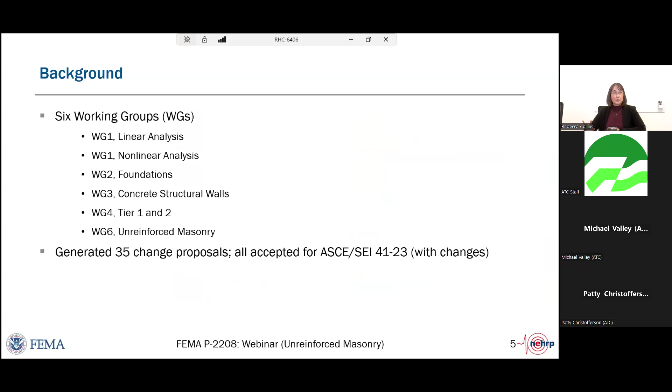There were 6 working groups that generated 35 change proposals for ASCE 41, including the technical background for those changes. All of these changes were accepted by ASCE 41-23, and now FEMA is funding presentations on the technical background for 3 of these sections. The nonlinear analysis one has already taken place, and the recording is available from ATC.

Concrete structural walls is coming up in a couple weeks, and today we're doing unreinforced masonry.

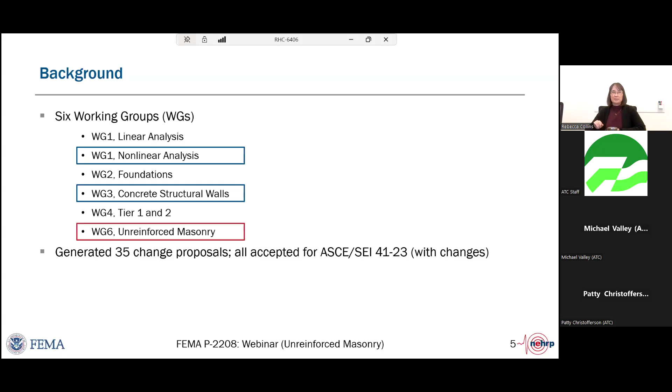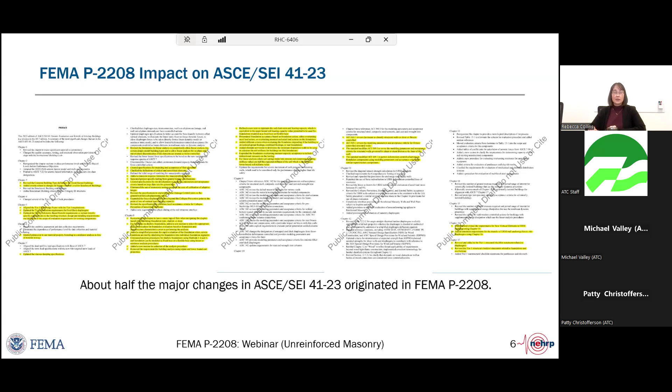This slide shows the first 5 pages of ASCE 41-23, which is a summary of all the changes made in the document. About half of the major changes in ASCE 41 began with material provided by this ATC 140 project. So this FEMA funding has made a huge difference in getting the standard updated.

The recommendations of FEMA P-2208 were modified by ASCE 41 committees, so the document contains the technical background, but not the final standard language. That's something to be aware of—you can't just take the FEMA P-2208 language verbatim, because it might have been changed a bit.

It's intended to be used in conjunction with ASCE 41. We're presenting the recommended revisions that came out of this particular project, but it's just the technical background, not how to use the document.

For the final changes, ASCE intends to present webinars on the various topics, and these webinars can be purchased and viewed on their continuing education page. That's where you would go for exactly how to implement ASCE 41.

FEMA is also going to update P-2006. This was the design examples for ASCE 41-13, and now it will be updated to cover ASCE 41-23. That document is expected to be released in late 2025. Work's already underway on it.

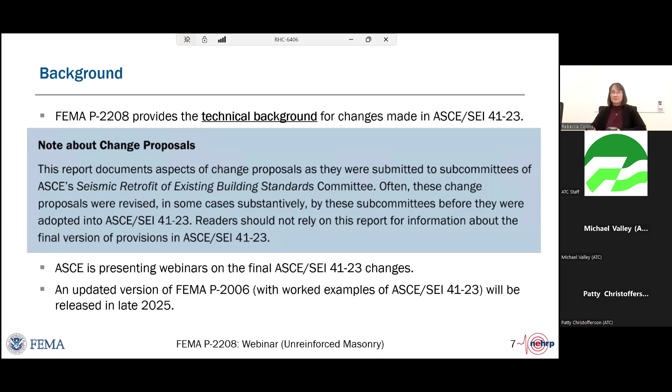The motivation for updating this standard is the seismic risk from existing buildings is very high, especially those that were constructed prior to the development and adoption of modern building codes. For masonry in particular, the majority of ASCE 41-17 goes back to FEMA 273, which was published in 1997, and that goes back even further to the ABK method developed in the 1980s. So a lot of this hasn't been updated in a while.

Chapter 11 has had some sections updated more recently, mainly spandrels and the wall failure modes. But the further research that has been done since that time, and use of the updated provisions, has led to a desire for more changes.

Just so everybody's aware, unreinforced masonry occurs in two places in ASCE 41. There's Chapter 11, which may be used for any performance objective and works with the main body of the document. Chapter 11 just covers masonry, and for your demands you'd go to the analysis, Chapter 7, working it in conjunction with all the other sections.

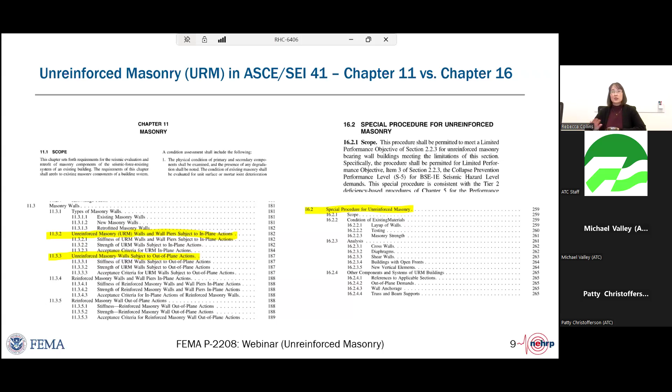Whereas the Chapter 16 part of unreinforced masonry is just the special procedure. It's a limited performance objective, meant to be more standalone. Chapter 16 evaluations identify the major flaws in URM buildings, but typically at a lower seismic hazard level. Chapter 16 is also limited to certain building types - for example, they have to have flexible diaphragms, be 6 stories or less, and there are other requirements. So the items discussed today, we'll try to clarify which chapter they're applicable to, because they're not just mix and match.

Starting off with new vertical elements in Chapter 16: the URM special procedure has always done the evaluation of URM buildings, but it didn't have clear provisions for retrofit of those. ASCE 41-17 added some retrofit provisions, but they actually stepped outside the special procedure, mixing and matching between the main body - go get your demands from Chapter 7 - and then trying to come back to the special procedure. This was a bit confusing, and it also made retrofits more conservative than the rest of Chapter 16 evaluations.

Another issue is deformation compatibility. New elements are often not stiff enough to attract loads away from the URM before it fails, so we wanted to address that. There was also no clear path for distributing shear between new and existing elements, and detailing requirements for new elements were never mentioned in the special procedure.

So the goal of our working group was to create an integrated set of provisions for new vertical elements going into a URM building that deals with demands, drifts, and detailing.

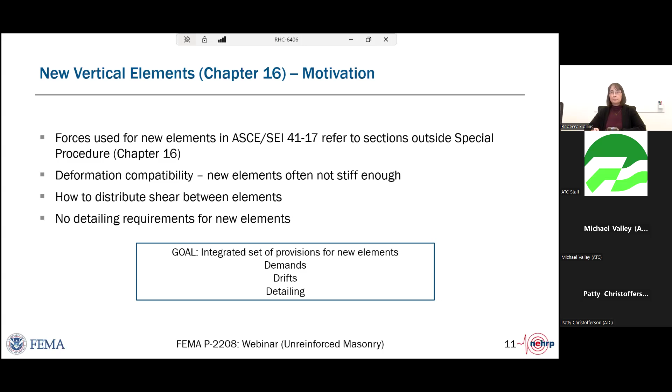Three different case study models were developed. We started with this 2-story model with lots of openings, then stretched it up to 6 stories or collapsed it down to 1 story, keeping the same footprint and opening distribution, just to see what would happen with different variables.

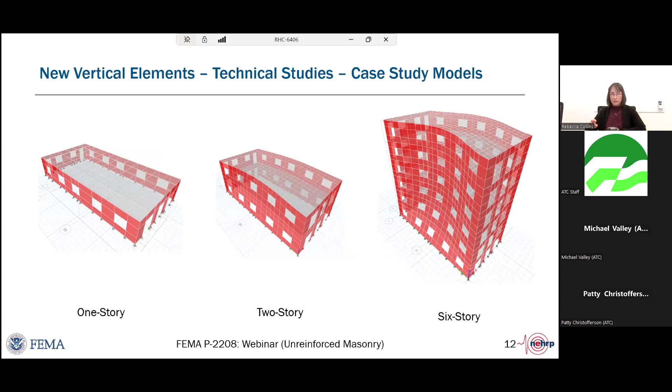We also looked at 3 different retrofit scenarios. We studied the transverse direction, as that was the direction the building had the most issues. In situation 1, we added shotcrete on both ends at the front and rear elevations. Another retrofit option was putting an element in the middle of the building, either a reinforced concrete shear wall or a steel moment frame, which would take some of the seismic load and reduce the burden on the 2 end walls.

Situation 3 was where we studied an open front building. These are very common, especially along main streets where you'll have retail at the first floor. Here in Seattle, we often find it's just cast iron columns - no masonry, no moment frame - and something needs to be done to strengthen the building there. We studied both steel chevron brace frames and steel moment frames. Not all these retrofits were applied to all the different combinations, but we did study quite a few.

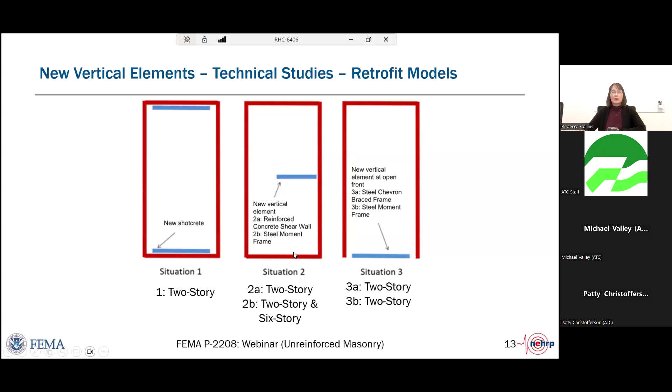In this particular case, we had a new concrete shear wall added along one elevation. It was only done at the first floor because the upper floor demands were okay. We compared it to the unretrofitted condition using demands based on the special procedure, Chapter 16. We also looked at it with demands based on Chapter 11 with and without M factors. Basically we tried all the different possible methods we could think of for designing this new element and see what the results were.

What we found was using Chapter 11 was really difficult, as determining an M factor wasn't simple. The concrete and the masonry are now attached, so it's not obvious how they would interact - do you use an M factor for concrete, for masonry, or is it somewhere in between? Based on past studies with FEMA 547 and FEMA P-2208, and this current study, we decided to recommend making it clear that new elements may use demands based on the special procedure, so essentially we're getting a retrofit behavior that's consistent with the special procedure goals.

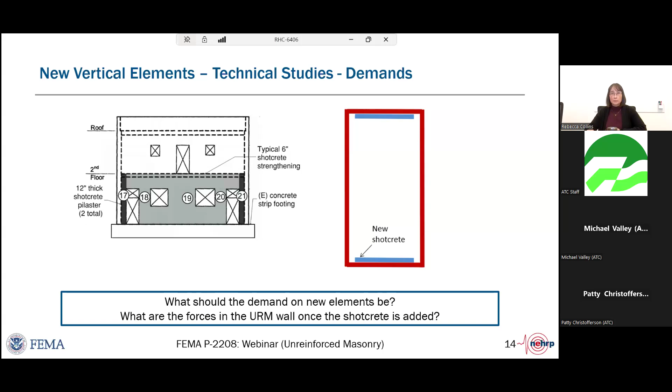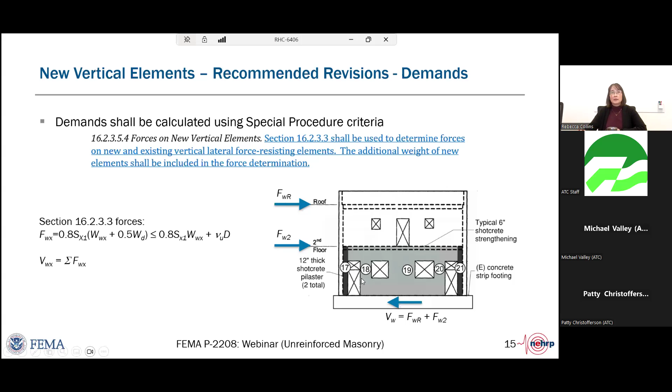Using that special procedure, you would use the same equation you were already using to calculate your loads on your URM walls. In this example, your roof load wouldn't change because you haven't changed your weights or your diaphragm weight or capacity. Then at the second floor, you'd have an increase in load because you'd include that wall weight. Summing up the roof and second floor would give you the demand on the combined wall - concrete wall plus URM - and that would give you your demand.

And then once the wall force is calculated, the recommended revision clarifies that the shear distribution should be based on relative rigidities. So your URM wall stiffness and concrete wall stiffness would be calculated, and then you proportion your demand based on those stiffnesses. Each wall only needs to be checked for that portion.

Also, you do need to check the URM, even if you decide to say, well, I'll just design my concrete wall for 100% of the forces. It's still a requirement to check the URM wall and make sure that it is not going to fall apart.

So the impact of this change is you're going to have reduced demands compared to what we had in 4117, because you're not stepping outside the special procedure and using the Chapter 7 analysis, because the special procedure forces are lower. An engineer may still conservatively design the new concrete wall for 100% of the forces, but you are going to have to check the URM on it.

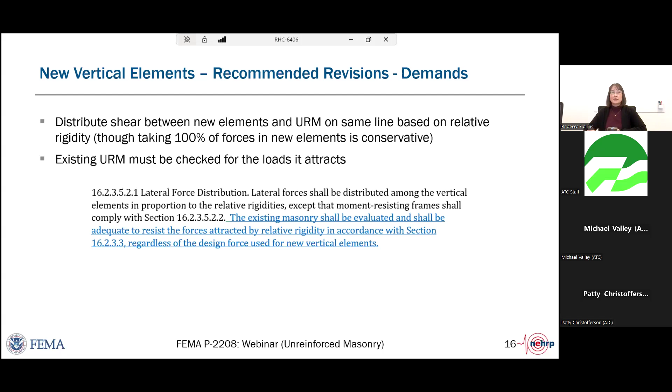Now, sometimes you try to design your concrete wall, or maybe it's a steel moment frame or brace frame, and you find that you get ridiculously large sizes in order to protect your URM wall.

So we did add commentary to help address that, saying that if you want to design your new elements for 100% of the load and not check the URM walls, you can, but then you have to provide complete gravity support for your floor and roof framing. And you have to have vertical bracing of the URM walls to prevent them from becoming falling hazards, so they'd have to be tied back into whatever you're doing. So essentially your URM wall just became very thick cladding. That is still allowed if you start to get ridiculously large sizes for your new elements.

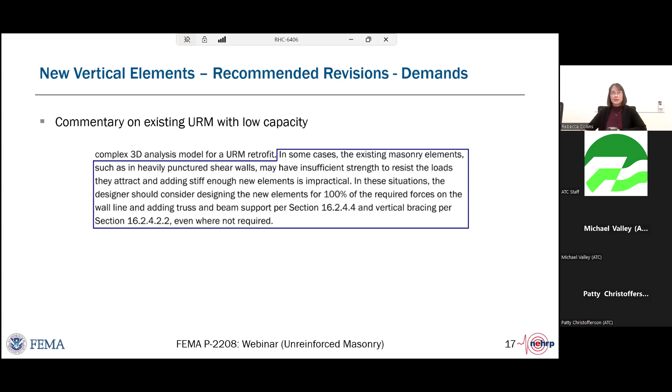So for drifts, we studied reinforced concrete shear walls and moment frames placed at midspan of the diaphragm to see what this was doing to our diaphragm and to the two end walls.

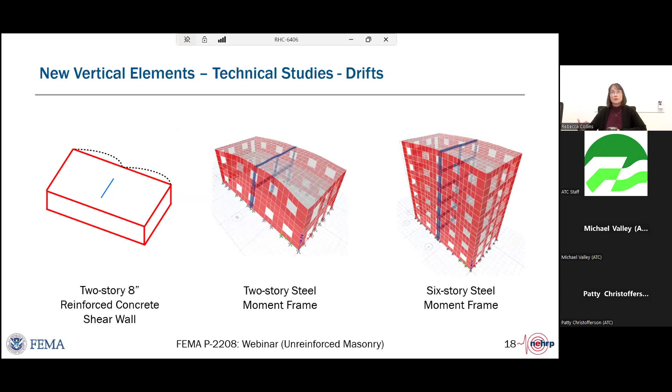So currently ASCE 4117 has a 0.75 drift limit, but only for moment frames, and it's actually at a different force level because it was stepping outside the special procedure. So we took a look at, well, what if we have all these different drift limits from none on down to 0.75% were studied.

And what we found is that at the very high limit, or no drift limit, the steel moment frames tended to produce about the same midspan diaphragm drift as an unretrofitted building. In other words, the steel moment frame isn't actually pulling load away from the two end walls effectively. It really took until you got down to the 0.75 drift limit to cut the mid-span diaphragm drifts in half.

So that was going to be where the recommendation was leading. We did design these frames with a 2D program because we want to try and make sure this is easy for engineers. If you want to go in and design a new element, it's flexible diaphragms, URM building, you could use a 2D program. So we did that initially, and then we checked it with the 3D program and found that the answers were acceptable.

Another thing that we found as we were looking at diaphragm drifts was what your diaphragm span was. Currently the diaphragm span, the way it's defined, is between URM walls. And we realized that that shouldn't actually be correct. We really should revise the language to say that the diaphragm span should be between vertical elements.

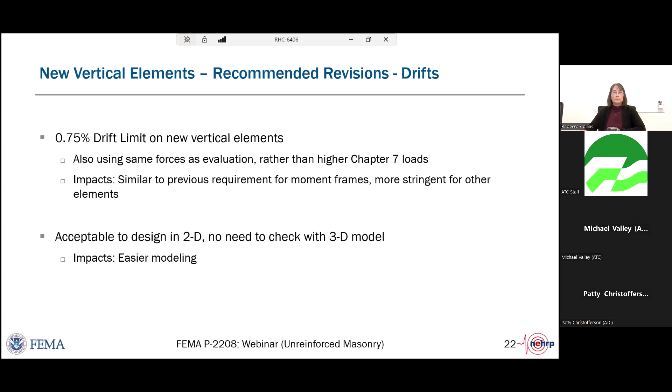We also looked at detailing for new elements. Once you start using that 0.75 drift limit, this really leads to members that are much larger than needed for just the force demands. So the highest demand to capacity ratio we had was around 0.5. So there's a good amount of overstrength in this system now, and you only need limited ductility from your new elements.

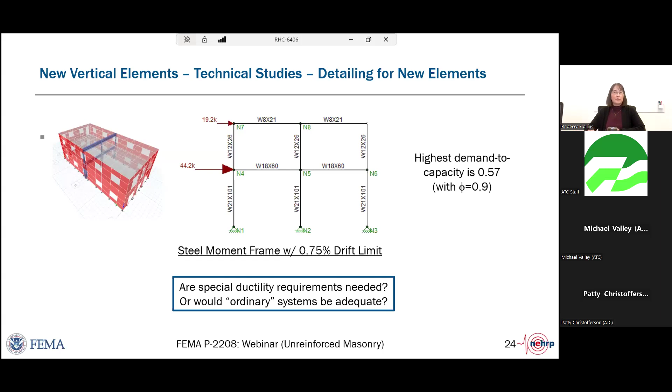So this led to the question of, do we really need to say we have to have special systems? Do we need a special moment frame, or would an ordinary moment frame or ordinary concrete shear wall be acceptable?

So we did go through and do a review of what the ordinary requirements are. For a steel ordinary concentrically braced frame, the braces, you can actually allow tension-only members. They only need to be moderately ductile. And then for your brace connections, you design them for basically the member strength and with some overstrength factor when you're looking at new design. So this is all the requirements there are.

Whereas if you look at a special system, you've got a much longer list that needs to be met. Similar for ordinary moment frames, you don't need special B over T ratios, no protected zones, just the higher design on connections to make sure they're stronger than the members.

And for ordinary concrete shear walls, Chapter 18 doesn't even have any detailing requirements for them. You would just default to Chapter 11 in ACI 318 that has some minimum reinforcement ratios, minimum bar spacing. As a matter of fact, we were a little surprised to see that it didn't even require you had hooks on your horizontal bars at wall ends.

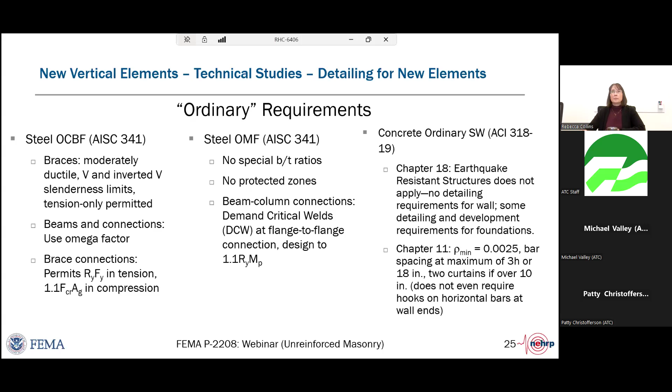So the recommendations we made were that an ordinary system is acceptable since we only need limited ductility. One exception was we did decide to say that reinforced concrete shear walls, you do need a 90-degree hook on the ends. It's a limited addition, not a lot of expense, and it'll still give you better behavior.

The other thing we looked at was to make sure that certain systems that are not permitted in seismic design category C in ASCE 7 are also not allowed for vertical elements in regions of high seismicity in 41.7 and 41.23. Basically, the systems this eliminates are your unreinforced concrete shear walls, unreinforced masonry shear walls—you can't add new ones—or reinforced concrete moment frames, the ordinary ones.

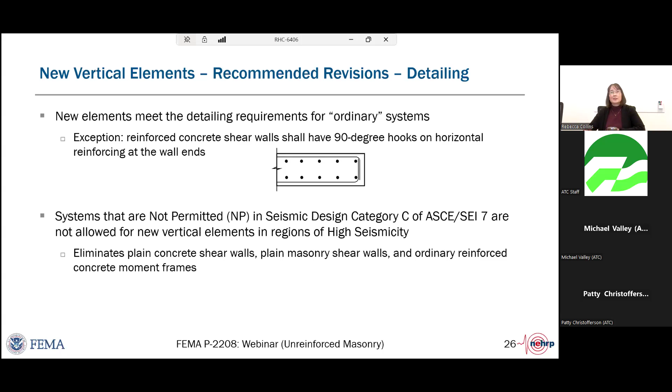So these are systems that aren't usually used anyway in areas of high seismicity, so we're not really changing what engineers are doing most likely in their designs. So that was the vertical elements. Now looking at subdiaphragms in Chapter 16.

The special procedure in 41.17 requires that you anchor the walls, the URM wall, to the diaphragm. This, as everybody who's looked at URM knows, is one of the biggest things we can do to help prevent failures on these buildings. However, it doesn't explicitly require developing that load into the diaphragm. You can just provide an anchor from the wall and connect it to the first joist bay, and that would meet the provisions in 41.17, Chapter 16.

Without this additional strapping and blocking, though, you could actually end up with the floor fracturing at this first joist bay, and we don't want that behavior. So this is different from the main procedure in 41.17, which does require that the wall anchorage be developed back into the diaphragm. But since the special procedure is standalone, it doesn't reference back to that piece.

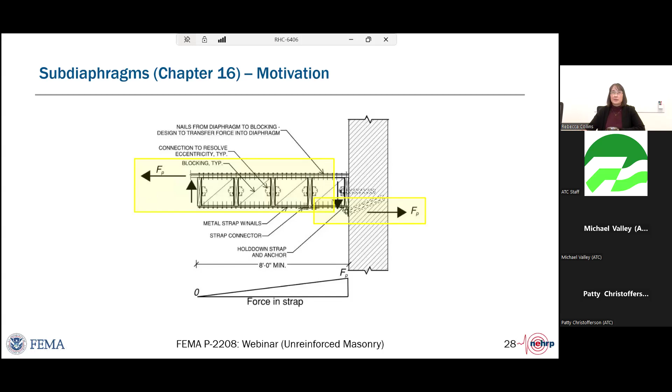So our proposal was to develop the anchorage. Basically, we mirrored the requirements back in the main procedure of 41.17 using subdiaphragms. So this does require that you'd have to calculate subdiaphragms, cross ties, and chords.

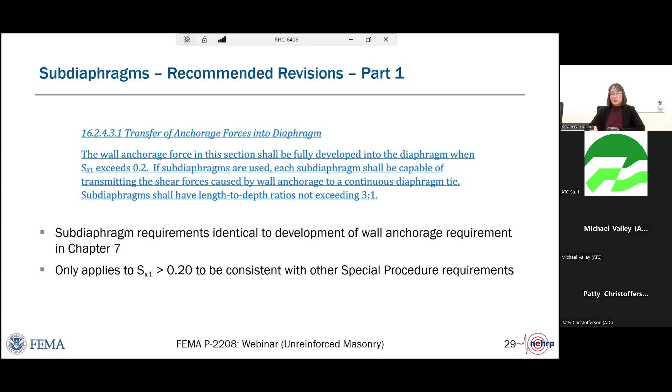So that's one path, but we also wanted to consider a simpler path since this is the special procedure. It's a limited performance objective. The intent is to encourage and not discourage an owner to undertake these retrofits. So in addition, wood diaphragms also behave in a ductile manner, and they potentially have greater capacities than the prescriptive calculations. So as an alternate, simpler method that we studied, we started with an example building and we looked at full code.

Over here on the left, this is what you'd have to do: calculate your subdiaphragms, your cross ties, all the way across the building. We also looked at a partial code method. What if you just develop your anchor 10 feet or maybe 8 feet back into the diaphragm, and you don't do the cross ties and you don't do the subdiaphragm calculations? We studied this for both transverse and longitudinal directions. I'm just showing the picture for transverse here.

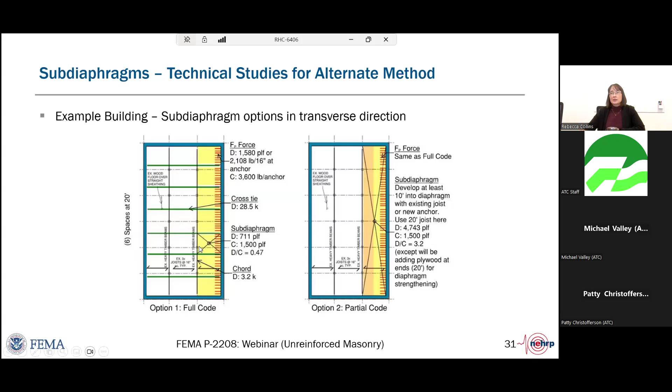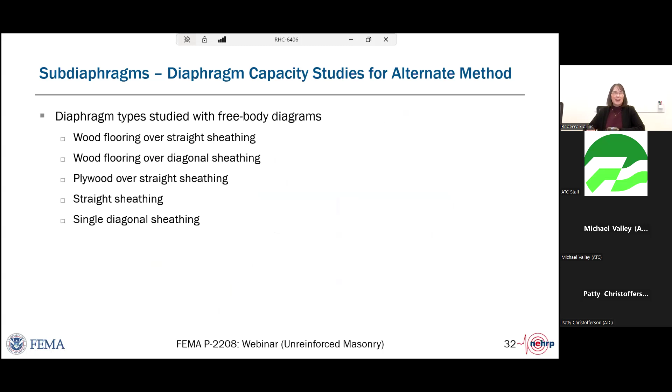And when we looked at the subdiaphragm forces, if no cross ties were added, we did the calculations and compared them. We also looked at what would happen with the different diaphragm types. So if you don't have subdiaphragm chords or cross ties, you still have a diaphragm that continues across those boundaries and could potentially develop forces.

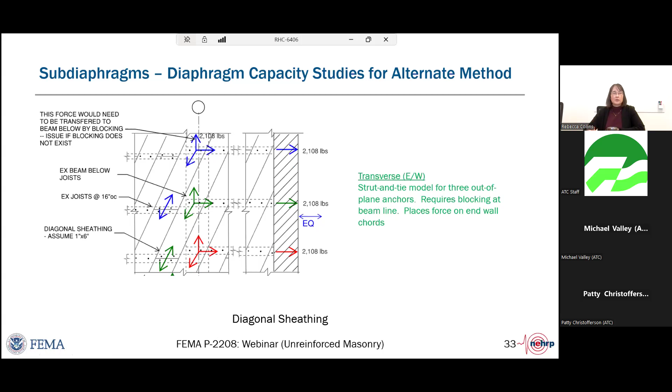So then we combined our building case studies and our diaphragm studies into a giant parametric study where we changed building size, diaphragm aspect ratios, looked at solid walls with openings, different diaphragm capacities, and different development lengths.

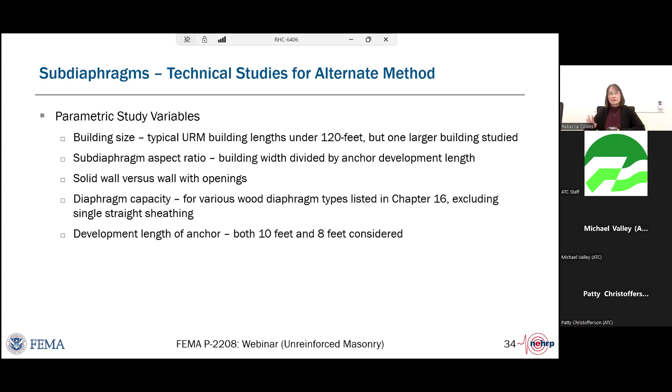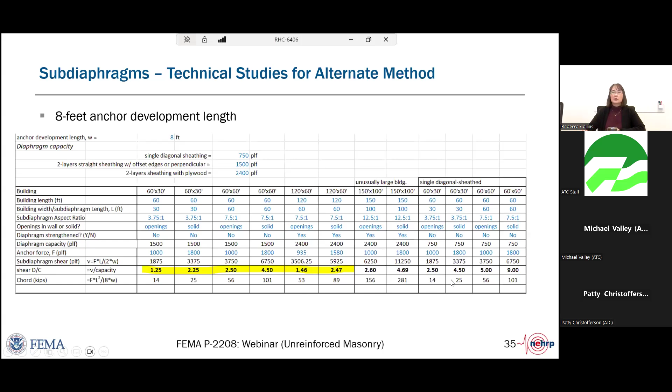And for typical building sizes, using Chapter 16 diaphragm capacities, not our larger ones from those studies, we were getting DCRs under 2.5. We did end up having to exclude single diagonal sheathing. The DCRs jumped up way too high on that one, so we ended up saying we're going to need to exclude that because the DCRs were too high.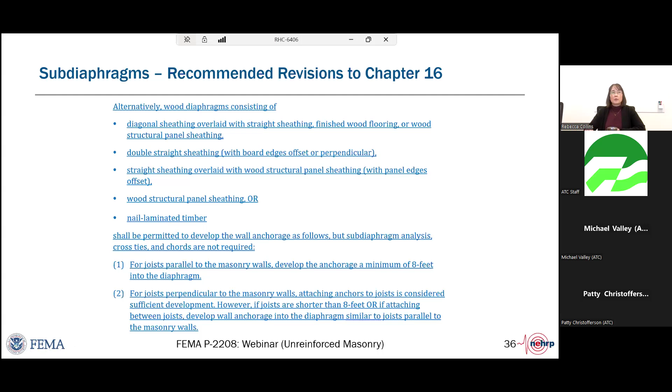So based on all those studies, there's also a simplified path compared to a full subdiaphragm analysis that takes advantage of these more ductile wood diaphragms. So you only need to develop your anchorage a minimum of 8 feet into the diaphragm.

So going back to our wall anchorage figure, if no subdiaphragm analysis was performed, you could come in and say we're going to develop it back 8 feet. This is showing joist parallel. You could also, if the joists are perpendicular, attach your anchor to the joist. And if your joist is longer than 8 feet, then you would be done. You wouldn't have to remove finishes and come back going further into the building.

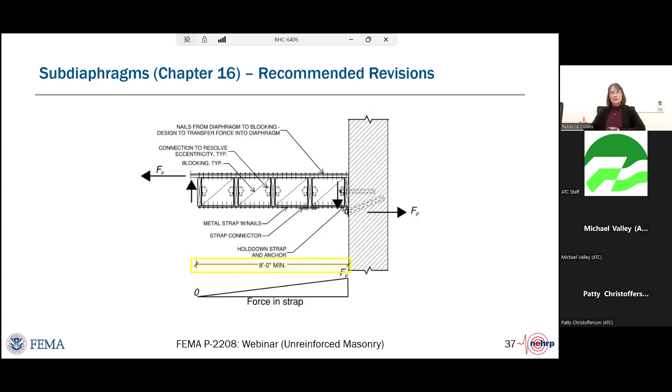So the impacts of this revision are we can get better URM performance because our anchors are now developed. We're requiring that, but we're allowing multiple methods to meet the requirements. You can do a full analysis, or you can come in and do something quicker and just say 8 feet. We'll make sure and meet that.

For wall out of plane behavior, we looked at this for both chapters 11 and 16. In chapter 11, we're still using this table for collapse prevention for H/T ratios on the URM walls, and it's based on older research, and that research at the time stopped at about 0.4 G. But we now have many areas in the country with much higher spectral acceleration values.

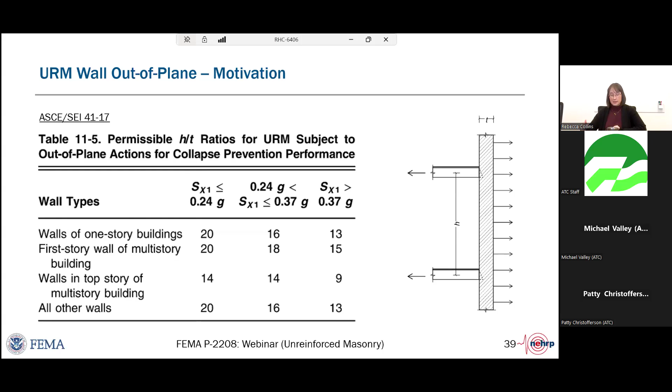Chapter 11 did include an updated H/T ratio out of plane check for life safety that was based on the Penner and Elwood method. And we'd like to bring the different performance levels all into one standard system, not some equation, some table. We also want to address what to do for limited safety and damage control performance levels because they weren't addressed.

And this equation method that's in there, the Penner and Elwood method, has a bunch of different variables. It depends on diaphragm stiffness, axial load on the walls, wall thickness, and performance level. Penner and Elwood included these variables, but they do note that there are a lot more variables that would still need to be tested, and they recommended a bunch of future studies. So hopefully someday we'll get that, and maybe we can incorporate more items into this.

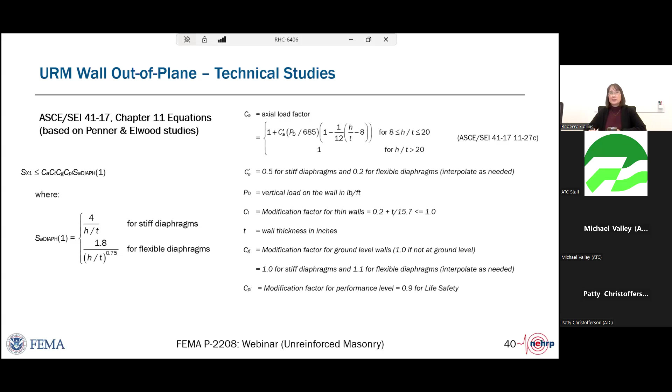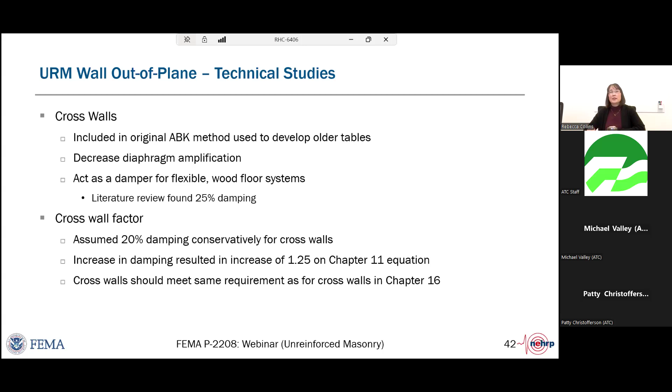Adding another factor into it would allow us to increase the damping. Well, the damping's already there from the cross walls, so it would allow us to increase our H/T ratios up to 25%.

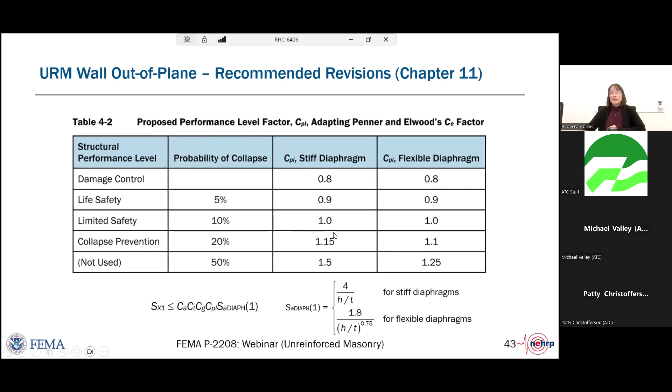So the result of this study is we ended up with new factors, not just for life safety, which was in there previously for the equation, but now we have factors for the other performance level methods. We get a little bit of a benefit from stiff diaphragms, so we're going to keep that in for collapse prevention.

We also added the new crosswall factor to the equation. The old collapse prevention table of H/T ratios will be deleted from the standard. So the impact of this is going to be at those higher seismicities, Seattle and San Francisco, but other areas also - your H/T ratios are going to be much lower. So more walls are going to require strongbacking in high seismicities.

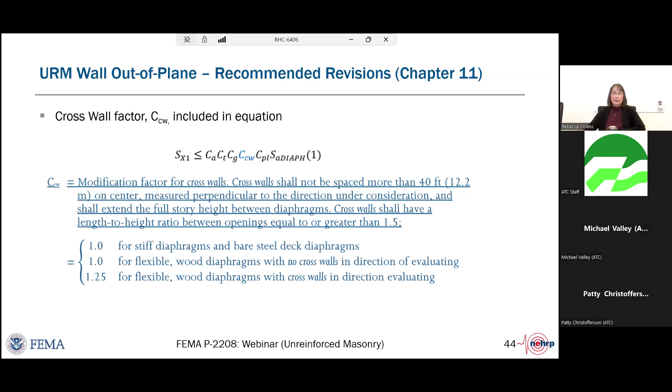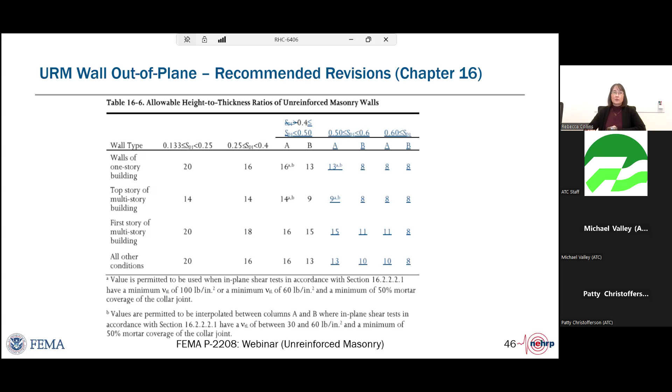So, wall force redistribution. A little background: there are 4 failure modes that are checked in Chapter 11 for wall piers. Two are deformation controlled modes, rocking and bed joint sliding, and two are force controlled modes, toe crushing and diagonal tension.

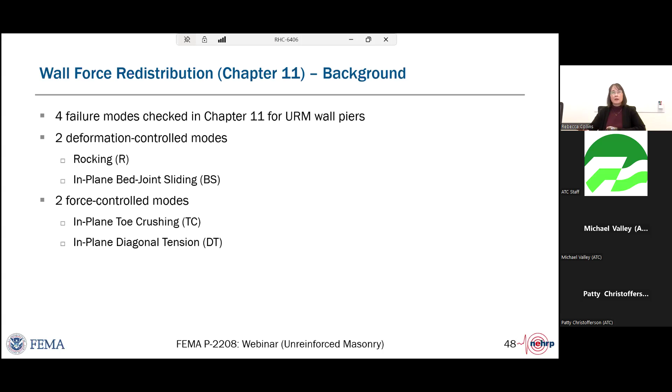So we have this kind of mix and match of some deformation controlled, some force controlled. That's not so bad when they are in separate lines, especially separated by flexible diaphragms. But the linear methods don't specify how to evaluate multiple modes in a line of resistance, so typically we look at each individual component when we're doing ASCE 41 and evaluate it separately. This is also true of concrete piers in ASCE 41.

So there's no provisions to allow moment redistribution between wall piers in the same line. However, Chapter 16, the special procedure, does classify the wall piers in the line based on their behavior in relation to each other. So for example, if you've got rocking controlled piers in a line with shear controlled, you actually ignore them and distribute the load to the shear controlled walls. There's a whole flow chart you can find for this special procedure on how to negotiate this when you end up with mixed modes in the line.

But what it does is allow the engineer to better utilize the total strength of a line of resistance. Just because you have one wall fail in that line doesn't mean that everything needs to get strengthened.

So we wanted to come up with some method that would allow for moment redistribution if possible, so we can better utilize that total line strength. Nonlinear studies have indicated that once you get yielding in one component line, it starts to redistribute.

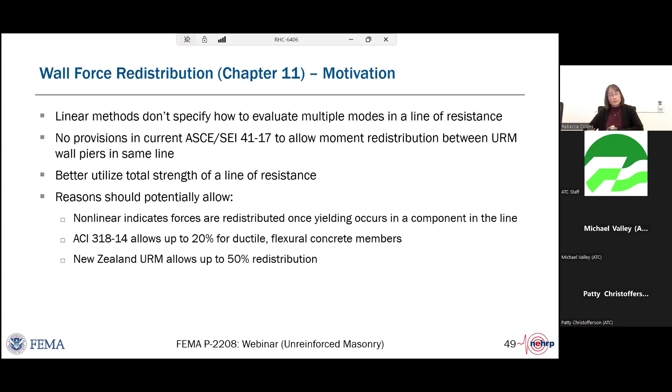Here's an example of where moment redistribution could potentially be possible if you've got mixed modes. This case just included deformation controlled modes. We started with that, and you can see here the two end piers are rocking controlled, that's our little R there, and the two interior ones were governed by bed joint sliding, that's the BS on those two interior ones.

All these walls have the same stiffness and the same demands, so they're all 12 kip demands. The capacities are slightly different because there's a little less gravity load on the two end piers, so that's why they ended up being rocking controlled instead of bed joint sliding. These two end piers with the rocking are just shy of the capacity to work, 11 kips versus 12, whereas the interior ones have extra capacity, 15 kips versus 12.

So it seems like we're really close to making this wall work, but technically the provisions would say it fails. The two rocking piers would need to be strengthened.

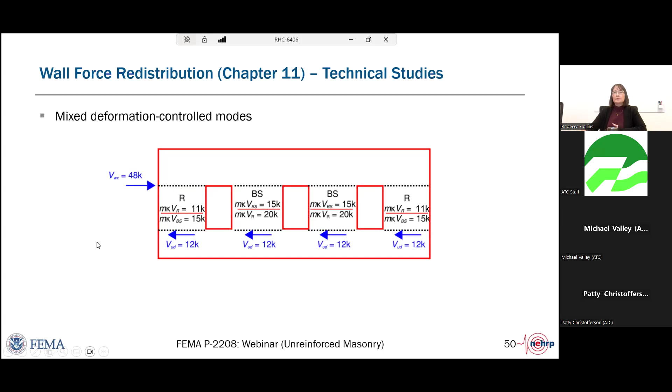We also looked at what happens if you mix deformation controlled and force controlled elements in the same line. So if you have rocking and sliding, but you also add in diagonal tension, which is force controlled, the catch is that these force controlled elements have much more brittle behavior. So it's not going to be the ductile modes we're hoping for. After looking at all of this, we determined it's not really acceptable to permit redistribution once you get force control mixed in.

This is consistent with the New Zealand code, which only allows it if all the wall piers are deformation controlled. In addition, 41-17 requires that rocking wall piers be neglected in lines of resistance that are not all deformation controlled. This bottom figure shows that with one force controlled pier, you then have to ignore these two rocking controlled piers. Their demands would go down to zero, and that demand would be redistributed to the two interior piers, at which point your interior piers are so much worse that redistribution wouldn't even be possible in that case.

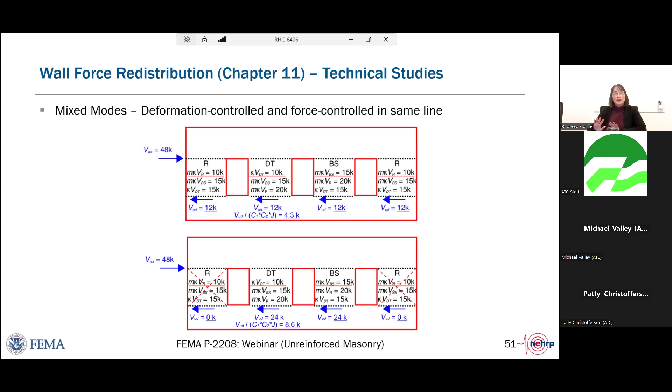So after looking at all the different factors involved in this, we ended up determining we should not allow redistribution in areas with mixed deformation and force controlled modes.

We did do a case study on an actual existing building in a high seismic region that had been through earthquakes and has had a lot of studying done on it. So the wall piers were all based on actual realistic conditions, and we calculated outcomes for Chapter 16, which has that kind of iterative procedure, as you can see here, for determining whether you're deformation controlled or force controlled, and what to do about it.

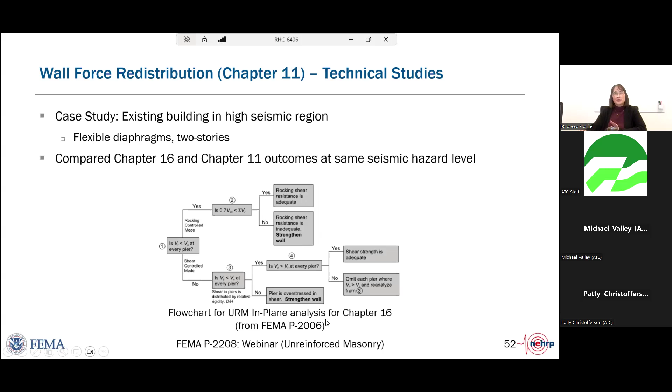We also looked at it for Chapter 11, to see, okay, we've already got this special procedure that allows some redistribution, what happens when we compare that to Chapter 11? In one case study, we had first floor wall piers that were all force controlled under Chapter 11 due to the high axial load ratios. The second floor all ended up being deformation controlled. You can see here at the second floor, the blue is the special procedure and the red is Chapter 11. We're actually getting fairly similar results going across, at least on an average basis.

If we have the mixed force and deformation controls here at the first level, now all of a sudden our two procedures start to diverge quite a bit. Chapter 16 provisions don't even consider that full force controlled case, all the piers were rocking controlled.

So you got a very different result, and it actually shows that everything worked. Whereas when we went to Chapter 11, the first floor wall piers were almost all overstressed, and even on an average basis, we're all overstressed. Based on this, we figured we shouldn't be allowing redistribution when we have mixed force and deformation control wall modes in the same line, because there's just too much uncertainty. The different methods just aren't quite agreeing on that.

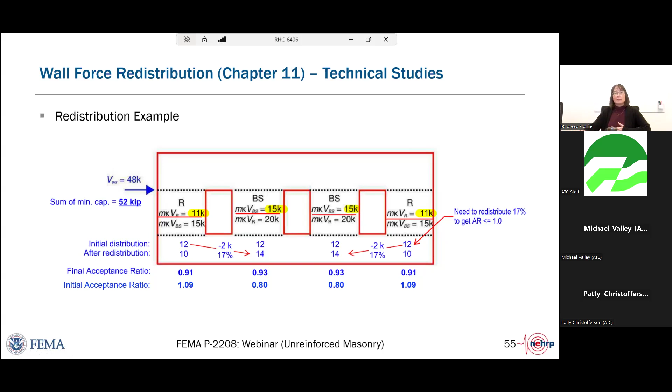Going back to that original example wall, if we do redistribute forces, we actually only needed 2 kips to be moved, going from 12 to 10. So if we take that 2 kips and moved it over to the adjacent walls on both ends, it was only a 17% redistribution. The final acceptance ratios all became under 1, as opposed to our initial ones that were just slightly over 1. Yet we didn't decrease the total force in the wall line. So again, this points to the indication that this is an acceptable procedure. We're getting behavior we expect.

So that's going to be our recommendation to the ASCE 41 committee: a maximum of 20% redistribution for collapse prevention was chosen - similar to concrete and ACI. We thought the New Zealand allowance of 50% was probably a bit much. And then 15% redistribution allowed for life safety, and no redistribution for immediate occupancy, because we really want to prevent that softening, to make sure there's no cracks and that the building is still able to be used after an earthquake.

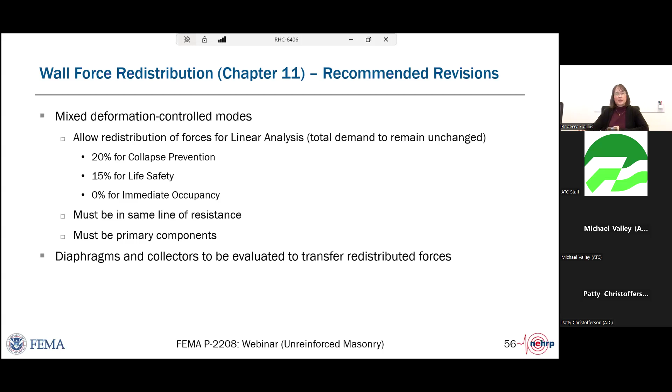We did include additional limitations: the walls have to be in the same line of resistance, and they have to be considered primary components. This is because secondary components are already given a break if they're deformation controlled. In addition, diaphragms and collectors must be evaluated to transfer the redistributed forces. So if you've got a spandrel that's going across the wall joining the tops of the walls, like we had in our examples, you would go in and check to make sure it can actually carry that 2 kips, say, over to the other masonry wall pier. There has to be some method of transferring the load.

Last recommendation we had to make was on URM rocking axial stress in Chapter 11. The M factor for the linear procedures for rocking has a footnote - you always have to look at footnotes in codes. This footnote limits the axial load ratio, FA over F prime M, to less than or equal to 4%. This is because the acceptance criteria were originally calibrated for this maximum axial load ratio. However, the committee at ASCE 41 has gotten user feedback that this is limiting. A lot of times you might have a ratio that's just 5% or 6%. Do we really have to jump from treating our wall as deformation controlled with an M factor, and bump it down to force controlled when we're just slightly over this limit?

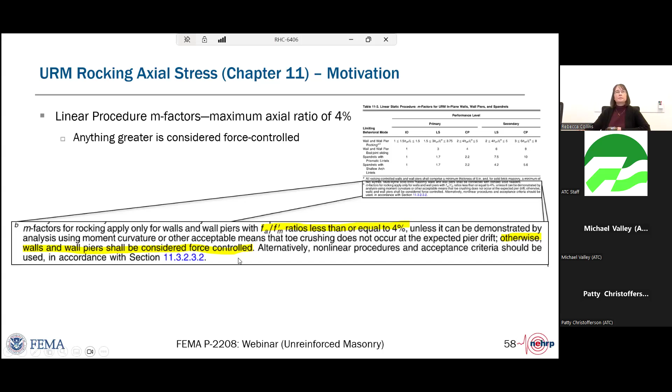So we went back and re-examined the original test data used to develop the M factors in 41-17. The M factors do decrease as the axial load increases.

You can see here for a squat pier with a height-to-length ratio less than 0.5, the M factor at 4% goes from 3 down to 1.5. For a slender pier, if H over L is greater than 1.3, at 4% it was 8, but as you head down to 8% axial load, you're getting an M factor of 3. The square pier, in between, shows a change from 6 to 3. So the slender pier is dropping much more dramatically in M factors as you go up in axial load ratios.

Beyond 8% axial load ratio, your M factors all drop to 1.5 or below, and you're really not getting ductile behavior anymore. So we still think there needs to be an axial load ratio limit, but we can extend it from what we have now.

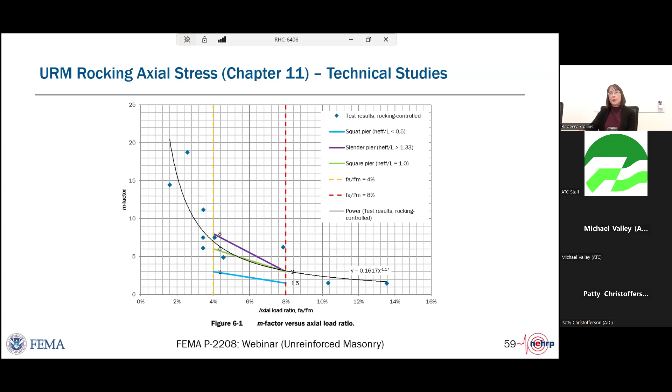The proposed revision is that the footnote will be revised and M factors will be allowed for axial ratios up to 8%. At that 8% level, you'll have to take half of the tabulated value, not to exceed 3.0. That captures the behavior of the squat, square, and slender walls shown in that graph, and interpolation between the 4% and 8% axial load ratio will be allowed. Beyond 8%, we'll still consider it force controlled because you just don't have the ductility anymore that we expect out of a member.

So the impact of this change is a wider range of wall piers may now be considered deformation controlled. You will get some lower M factors as you go up in axial loads. The nice thing is we're actually reducing some of the conservatism present in 41-17, so we're opening this up a little bit more.

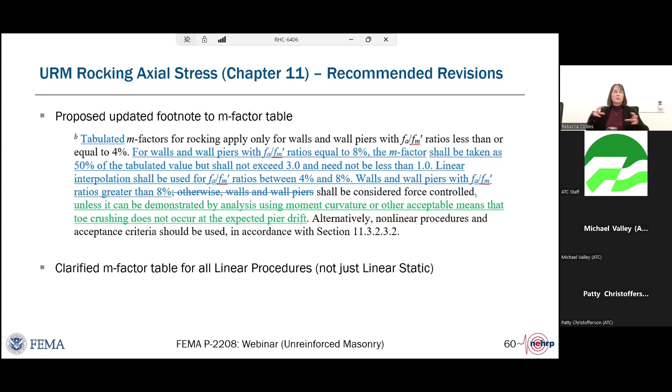So this wraps up the proposed changes by the ATC 140 project for unreinforced masonry. I really want to thank you all for tuning in today. As mentioned, additional webinars are planned for background changes on concrete structural walls that'll be coming up, and I'd love to hear any questions you now have on the unreinforced masonry material.

Thank you, Rebecca. We do have some good questions for you. I appreciate very much your presentation, giving us the details on how the FEMA P-2208 document addresses the items that we care about for URM.

I'm not seeing it, but I know which one you're talking about. I do recall when you had a midline and we had sort of two. Let's see if I can find it. There it is. This guy maybe.

Okay, the next one has to do with applying shotcrete to URM walls, and I have a couple of questions on that line. I'll try to get the big idea here. So if you've got an existing squat URM wall, it's strengthened in plane by adding shotcrete to one side. What's the effect on the four URM failure modes? So rocking, bed joint sliding, toe crushing, diagonal tension. How do you add the capacity of the URM in the shotcrete? And does adding the shotcrete change the failure modes that you need to be considering?

That is a great question. Unfortunately, the document doesn't really address that, what happens when you've added it, neither in the main body or in the special procedure. Typically, what we usually see is people will distribute the forces based on stiffness. A lot of your force will go to your new concrete wall, you'll have your force that goes to your URM wall, and then you'll just use the same mode that you had before. If you could find a technical justification, or did some additional nonlinear modeling, maybe you could come up with something, you could justify through engineering methods something different. But that's at least the first step usually in the process.

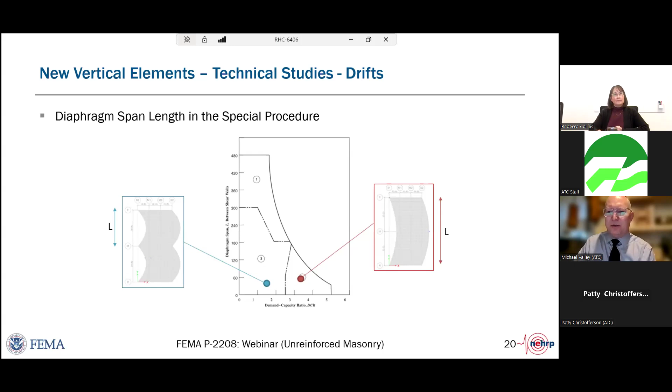Jumping back to a question about performance issues and drift limits. With respect to the open front building with moment frames, maybe slide 21, the moment frame columns and beams often get prohibitively large when meeting the 0.75% drift limit, especially for structures with tall ground floors. If there's no brick at that lower level grid line and weak soft story concerns are addressed, could that drift limit be relaxed?

Yes, so especially if you have a very open front building that didn't even have any masonry up above, and you wanted to deal with that open face, we still kept the 0.75% because there were also concerns about the masonry walls that are perpendicular, how much they are shifting out of plane. Especially by the time you get to the midspan, you've got not only the deflection of the frame plus the deflection of the diaphragm. So there were concerns there—that's why we left in the 0.75% limit.

But if you had reasonable engineering justification and the building department buy-off, that could be an option, especially if you're going for a limited performance objective. We have done that for things like a bolts-plus approach, where you're just fixing the worst things on the building. It's much better to get a moment frame that will at least take all the forces, even if it doesn't limit drift, for a limited performance objective. Great, so project-specific approaches. Thank you.

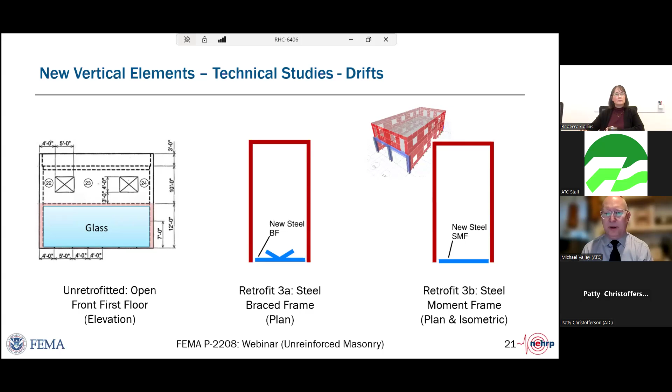This question gets back a bit to mixed modes. Since mixed deformation and force-controlled modes of failure are present in the same building, do you also arrange the connections of components like added vertical elements to be mixed—rigid, semi-rigid, and flexible—if the demand for limited drift is met? Is this permitted by the general provisions and the special procedure?

Let me get to one of the mixed mode slides to illustrate. So you're saying if there's mixed modes, can you arrange some added vertical components based on those mixed modes of response, tuning the added components based on the modes of response you're addressing? Yeah, so if you just wanted to fix certain piers but maybe not others, to try and avoid this particular force-controlled mode.

Yes, you can, but you have to be very careful with linear procedures because sometimes they don't always capture exactly what might happen as force-controlled walls that have a lot of load start to soften and change their mode and behavior. It can be difficult to predict, but we have gone in before and said, okay, we're going to strengthen up this section and reduce forces, and maybe that will also reduce what's going on with these different modes.

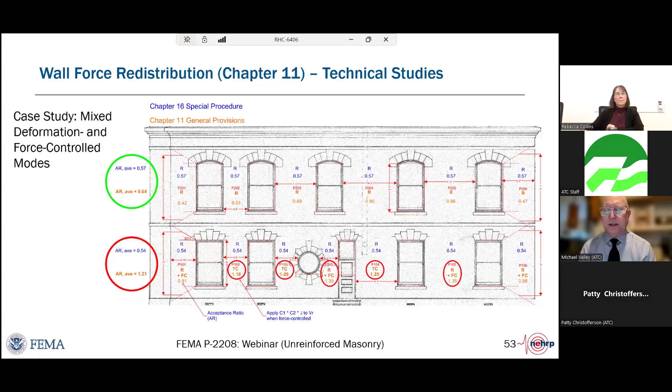Okay, good. I think we'll take time for maybe two more. This one is a different subject than we've been asking about. It gets to the H/T ratios that you discussed in detail. How did you assess the H/T ratios for different spectral accelerations? Can you explain the methodology a little more?

This is the Elwood and Penner work, right? Penner and Elwood had done physical testing on a small number of actual URM walls with different parameters. From that, they developed computer models of the walls, making sure they matched their results, and then ran parametric studies - something like 20,000 computer models on different walls with different spectral accelerations, from that small subset of physical tests. That's where they developed their equations, and that's where we came up with the information on what that equation was that follows.

So you get different spectral accelerations, and you can determine what H/T is reasonable for each. But that all came out of their work - they were up at the University of British Columbia, UBC, at the time, and those papers are available too if anybody wants to study them. We can maybe send some of that out with the questions and answers in case anybody's interested in diving into it.

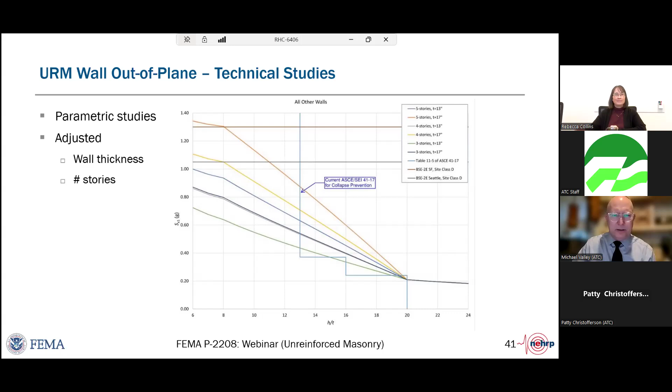Excellent, thank you Rebecca. We'll end the questions and answers there. We thank you again for your excellent presentation. We got to almost every question that was asked, and we'll have just a few things left when we report to folks.